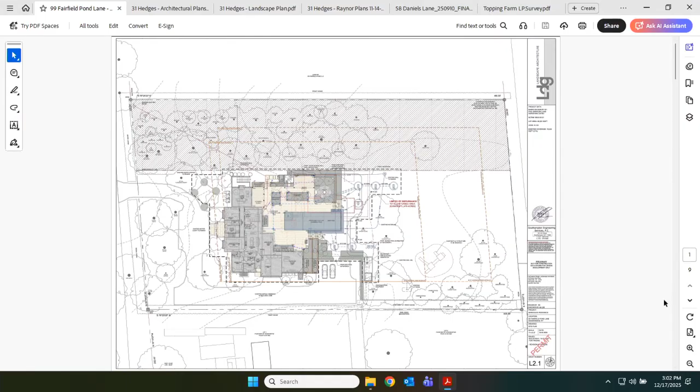Perfect. So one of our biggest concerns in the last round of comments was just to make sure that the applicant wasn't going to disturb the conservation easement on the north side of the property there.

We had asked them to demonstrate where the construction equipment was going to be coming in, and they've done that. They've proved that the construction access and construction vehicles can actually navigate through the site. They altered the grading in the rear yard a little bit around the pool, and they flattened the area immediately north of the driveway just a hair. I think that works out really well to allow construction equipment to get into the pool area without having to worry about any equipment going through the conservation easement that we want to make sure is not touched. I think they did a nice job addressing all of the concerns that we had.

Assuming that the applicant has addressed all of the outstanding comments of the village planner and the village board, we do recommend that the subject application be considered for site plan approval, with the same condition that we normally volunteer: that the applicant shall be responsible to repair any damages to the village right-of-way incurred as a result of the subject application. Just to have the sequence of revisions for the board: the original October 22nd, 2025 issue date, revised October 23rd, and then a final date, if it's for approval tonight, of December 4th, 2025.

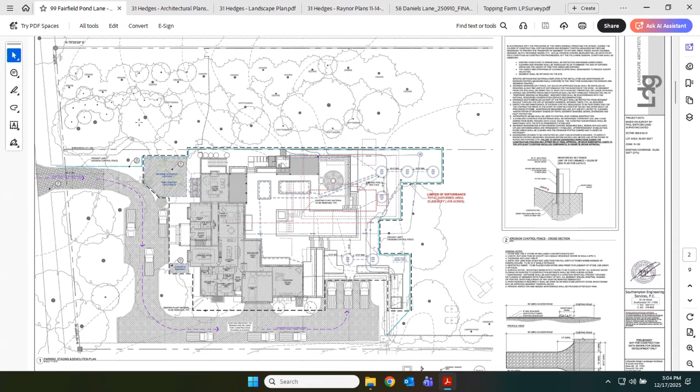New business: site plan application of the Winnie Trust, 31 Hedges Lane. Someone's here to present.

Do the camera so that it can, is it possible to? Excuse me, hold on a minute, Melissa. Whoever has their mic open, can you please mute yourself? Thank you. Go ahead, Melissa.

Good afternoon, Melissa Dedovich, Peconic Environmental Associates. I'm here on behalf of Winnie Trust LLC. I'm joined by Tim Haynes, the architect, on Zoom, as well as Denise Gernick, associate, Melissa Rivas, a partner with Hollander Landscape Design, and Kelly Kalbacher with the Raynor Group.

I'd first like to start, I think everybody knows this property, it's a pretty special property. We're very fortunate to be working on a team and working for a family who really wants to bring it back into its historic integrity. One of the things about the history of this property is that it originally was two properties, 601 Sag Main and 31 Hedges.

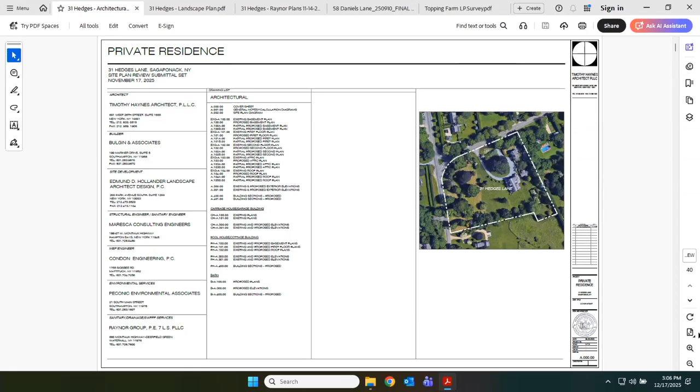31 Hedges was actually the one - could you go to the landscape plan? Is that it? Next one, more. Yep, no, this one. There we go, yeah.

So originally, you can see where the scenic easement was. Originally there were two properties, and the original property with the development on 31 Hedges Lane is the one with the two historic structures - the main house and the historic carriage house. Over the years, both buildings have been altered under the town of Southampton, to the point that to bring back the main house, the architects will get into more detail, but we need to bring back a lot of the historic charm and structures associated with the facade of the house.

Both lots were purchased by the new owners last year and were recently merged on October 14th, so the total acreage is now 3.95 acres. The clients retained Mr. Hollander to take a look at the site, and we also worked in conjunction with John Whitfield - there's John here.

Just to see how we fit from a zoning perspective - everything we're proposing is as of right, meaning no variances are required. So to generalize, what we're planning to do is remove...

Can we go to the demolition plan? Sorry. Was that - never mind the Raynor. The third tab, got it? Okay, there we go. Can you make it a little larger? Here, maybe, there we go. Computer, Melissa.

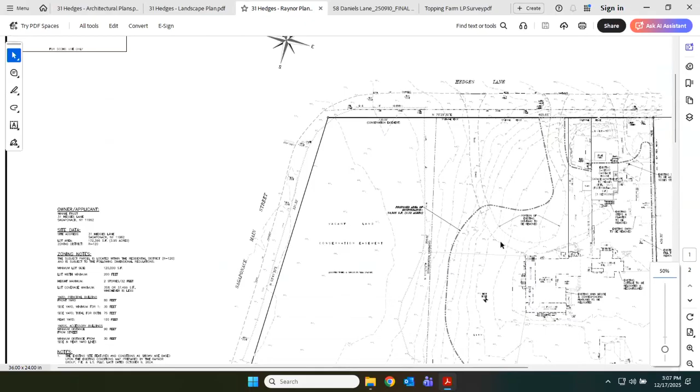Right now there is an existing structure, a former stable that's now a wood shop, on the eastern property line, and that's going to be demolished based on our review and discussions with the ARB. By the way, we've gone in front of the ARB for pre-application, and they said we're on the right track. They seem to be in support of what we're doing at this point - what we're showing you is what we showed them.

Then we're going to relocate the existing two-story dwelling about 45 feet to the west. We're also going to be removing some of the non-historic additions, restoring the house, and putting an addition to the rear. The architect again will get into more detail about that.

The existing two-story carriage house, which is actually a garage with apartments above, we're just renovating and restoring - no changes. The only change is in the back, an exterior staircase that was added in 1986 that we're going to remove.

We're also going to be constructing a single-story barn in the center, kind of in the vernacular of the existing or former stable, just to give a little more area for the clients and their four kids to have some more room. We also have a swimming pool with a surrounding terrace, sunken tennis court, fire pit, outdoor dining area and kitchen, and associated walkways and walls.

We're also slightly reconfiguring - if you go to the next, first, thank you. On this slide, or do you want me to go to the back? To second the page, on this one? This, right.

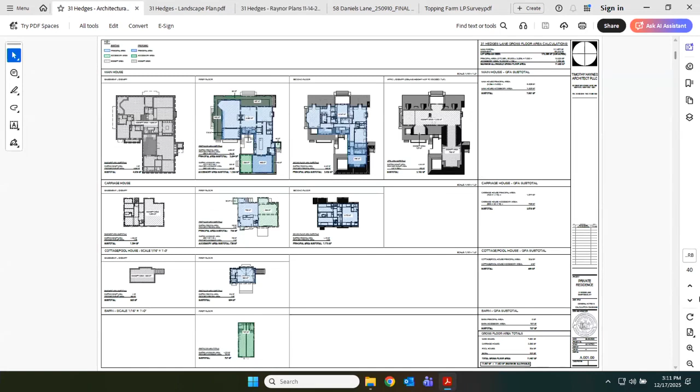I see it on C1 with the existing house to be moved. That's the existing house. We have another sheet, architectural, that shows it. Look at that, this is the new sheet. So C1 has the existing, okay.

No, go back. This one here does it. Okay, if you zoom in you can see the red, that's existing, and it shows where it's being relocated as well with the arrow.

Is it showing the driveway change? No, this is just architectural. Which sheet is this? This is the architectural sheet, 002. Actually it's the third page, lightly shown in red. Oh okay, on the sheet, on the existing structure.

This might be a good point for me to jump in. It's Tim Haynes, the architect, to talk about the shift, if that would be helpful. I'm sorry, last name again? Haynes, Tim Haynes. Mr. Haynes, you've got many people answering for you. That's good, I guess.

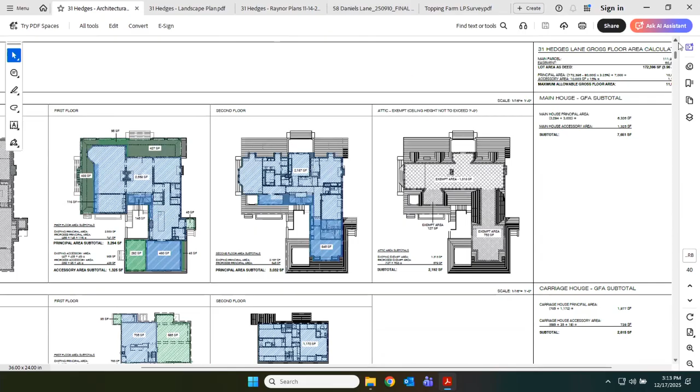So when we decided to combine the two properties, we made a couple of other strategic design decisions. One was to remove the stable that was back against the east property line and move it further into the property, so it was conforming. And then we had some extra square footage to add on to the property. Our objective was to restore the facades looking out at Sag Main in particular, and also onto Hedges, bringing them back to their historic state, because they had been filled in and made not historically correct. So we put that back into correct shape.

And then we wanted to put our additions on the back. So all of those things had us shift the house so that it felt more landed within the large parcel, as opposed to everything sort of squished back against the east property line. We wanted it to breathe a bit more and give us the space to do that, while still maintaining its prominent position on the hill.

I live around the corner, so I have watched this house for a very long time, and I'm actually the one who brought the clients because I wanted to find someone who was sympathetic to saving it and restoring it and putting into it what the property deserves. So that was our reason to slide this thing towards the west and a little towards the north.

45 feet's a lot. Is it on the hill? You have to bring in building stuff? We're not bringing anything, no. Ed and I spent a lot of time on the property to see what would make it seem like it had been built at the crest of the hill, with its wraparound porches, which we're restoring, which right now are not wraparound porches. There was this idea of it being an overlook at the high point on the property, feeling more central to the property, as opposed to when it was on a smaller lot pushed back. So it's now overlooking the reserve, the conservancy in the front.

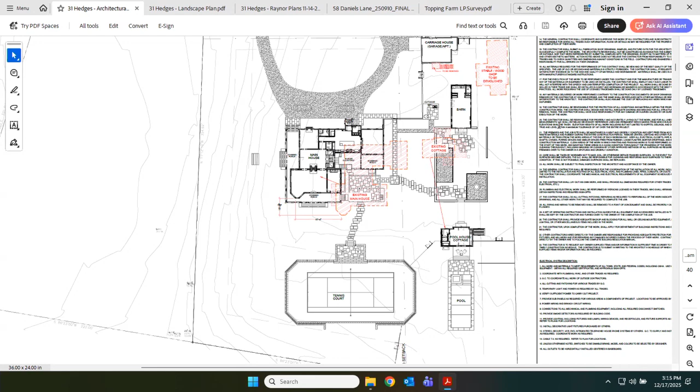300? Yeah, but it's not elevation. It's elevation, yes. We have a diagram showing the renovations and additions to the property. That would help.

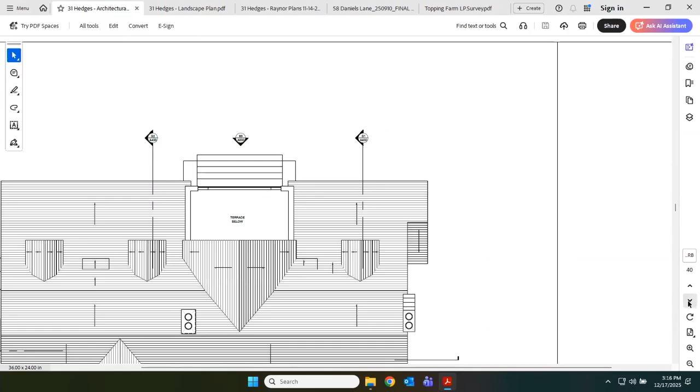So how much is the house being moved to the north? Does it look like it's 15 feet, 16 feet? So the big move is to the west, yes, it's almost 42 feet. So what's up there right now?

Probably in here, I didn't look at it. That's being moved, the little cottage - does that have a separate CO? That's your south elevation. No, it's the one at the front. Right, is that it? Is this what you're talking about? Yes, that's right. We're moving it down and turning it. Oh wait. Yeah, change, nothing to demolish here. You're not, except for that, just the wood shop. Right, this is falling apart.

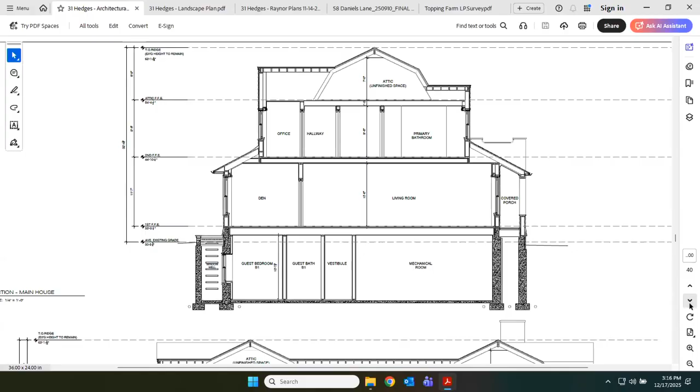This is the chart showing where it all came from originally, pursuant to the permits, as it came up. Proposed elevation, yes, it's on the same sheet, sheet A300. Each of them, make it smaller.

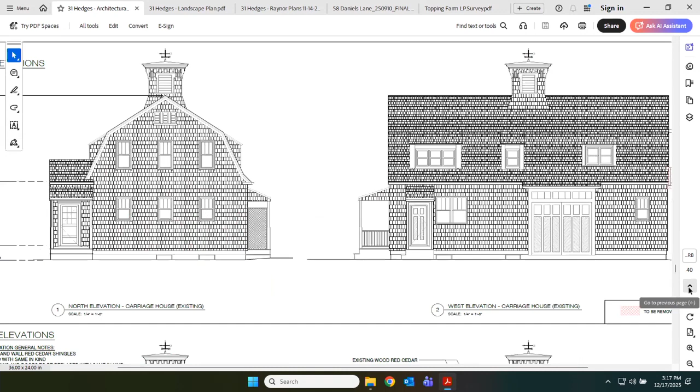So what is the elevation increase from the existing house? You can see it if you enlarge it. All right, here you go. Could you zoom out a little bit? There you go.

See the cottage? So we have existing above on the same page, and proposed at the bottom, so you can see it. Very sensitive, so what is it, feet-wise, what's the increase? Is there an increase on the elevation?

Yes. Not on the west side, only on the north side. So the addition being put to the back of the house, to the east. So that's not the west, right?

Are they taking this out, or is this an addition? No, this one's the south. That's the south. So if you go to the next page or the previous page, what page is this before? Over here, I can't see it.

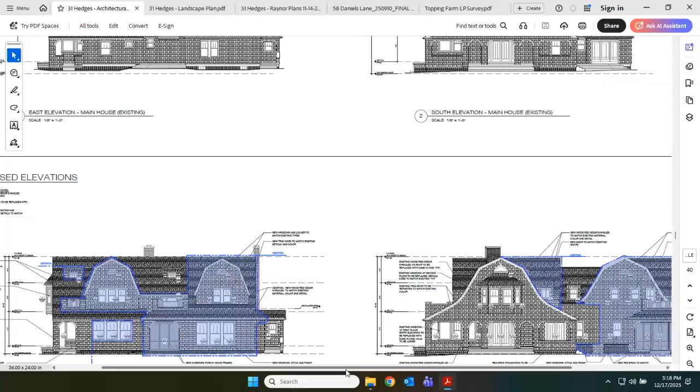That's the east one. So if you could go to the page before, to the west, right? These are the prominent elevations, these are existing, and below is what's being proposed. So the west elevation is only changing in terms of the wraparound porch. And as you see, the north elevation is where the addition is.

So if you look at this, they now all have it filled in. Yeah, it's all filled in, and that's gonna be a wraparound. Which page is that? This is A300. You all have these in front of you.

No. Push back, well, we have like 50 of them. What I have up on the screen. They should identify one on my sheet. So Tim mentioned that currently it's still included, so we're bringing it back. You can see this is all filled in, and now we're making it wraparound.

I grew up in this house. Oh, you're kidding me. I didn't grow up in the house, but I hung out like a fella.

So the big move is to the west. Yes. And what do you have to do for that? Is there any movement of landfill, or what has to be done there? That's 40 feet, kind of significant. Yeah, there's some slight regrading.

If you wanna pull up - maybe this is better for radar - there's a little bit of regrading that happens to that side of the house to accept that. Other than that, there's no existing trees or anything in the way. The only trees being removed on the property are where we're putting the pool. There's some evergreens back there and there's this little cutting garden back there.

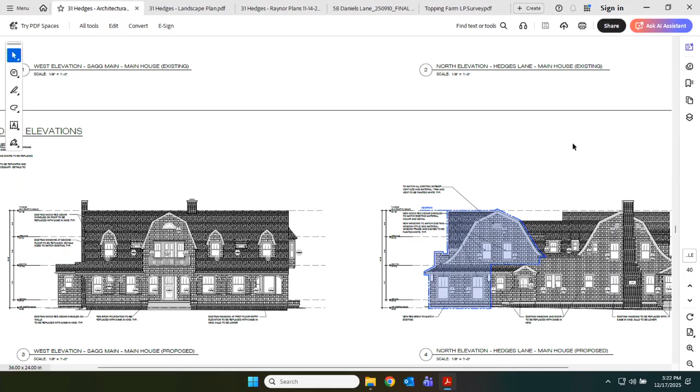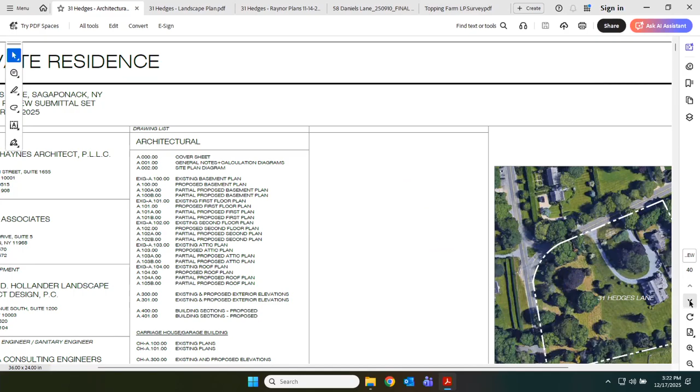Bill, do you want to hear from the civil engineer? Well, are we... says no. I'm happy to talk about the landscape, since I would like to.

Okay, I would like to graphically know about what you're gonna do with the property. It's a big piece of property.

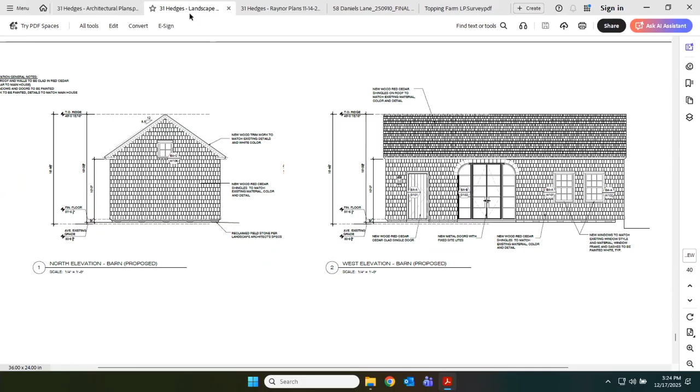Yeah, so we had the ability to walk the property with Tim when the clients were purchasing it, and they also had the ability to walk it with us, which was really helpful for us to hear about the history of the property from their eyes. They did a lot of great work putting a large portion of this into the easement, remaining just as it is today. So all of the area along Tagney will remain exactly as it is. The area along Hedges is also a pretty important scenic easement for the village, and this property really is a large portion of that fabric of the village. So everything along that corridor is being left as it is.

All the beeches that are there now, the dogwoods, the hedgerow along Hedges is remaining. The driveway is also remaining, so the entrances you see now along the street are being maintained. The benefit of the work we've been doing with the office to move some of the structures around gave a little more organization, and it allowed us to put a lot of the private program for the family, the pool, the entertainment areas, and the tennis court behind those important buildings. So everything will be subservient to those structures, and everything visible from the two main roads here in Sagaponack will remain largely as they are today.

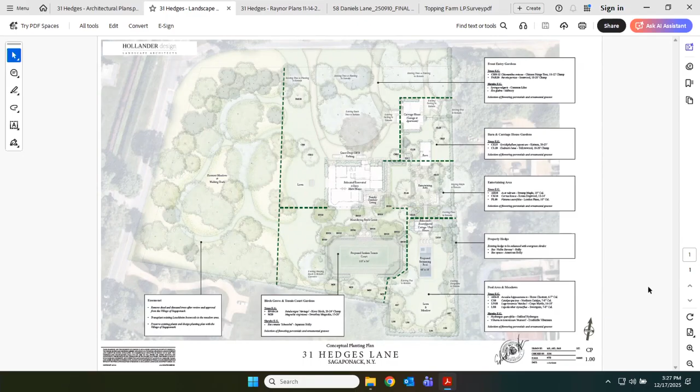Thank you very much. For the record, Kevin Peterman from LKMA as village engineer. Today I'll be speaking only on the engineering. Rich had prepared a planning memo, but I understand he's not here today, so I'll be speaking strictly on the engineering.

LKMA has reviewed the application materials submitted on behalf of Winnie Trust for the proposed improvements at 31 Hedges Lane. Our review focused primarily on the site plan prepared by the Raynor Group dated November 14th, 2025. The subject parcel consists of approximately 3.95 acres and is presently improved with a single-family residence, carriage house, cottage, barn, patios, and porches.

The applicant has submitted a site plan application pursuant to Village Code Section 245-65F, as the proposal includes modifications to the existing topography. The applicant proposes to relocate and reconfigure the existing two-story dwelling, shifting it about 40 feet west and 15 feet north. The existing barn is proposed to be demolished, and the existing cottage is proposed to be relocated south and converted into a pool house. The two-story carriage house will undergo renovations as well.

Additional improvements include construction of a new single-story barn, a sunken tennis court with terrace, swimming pool and spa with terrace, a fire pit, outdoor dining area and kitchen, walkways, and various retaining walls. The project includes new IA sanitary systems, site grading modifications, a new stormwater management system, landscaping improvements, a sunken courtyard, and window wells along the main residence.

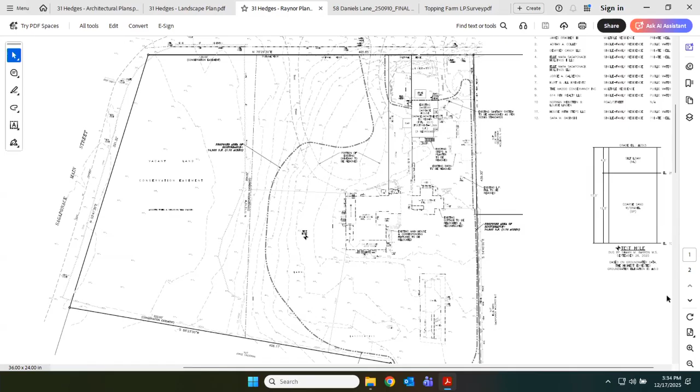We're asking the applicant to take a look at the south side of the proposed tennis court. Rhodey, on sheet C2, the next sheet in that set. Is this the set? Yes. Go down one. There you go. If you were to zoom in, page bottom, at the tennis court.

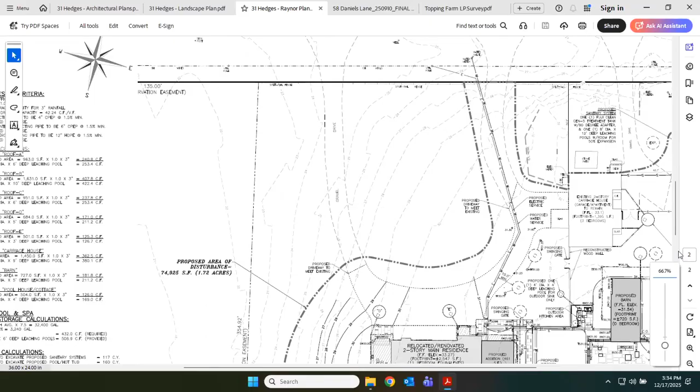Along the south side of the court, the applicants appeared to make an effort to satisfy village code, which requires that the tennis court be sunken 4 feet from adjacent grade. We see that they're surrounding the tennis court with a wall, making an effort to drop it and satisfy the code. But they don't quite hit that 4-foot mark on the south side, so they're not maintaining that 4-foot vertical differential from adjacent grades. They're kind of sloping gradually to get up, but even that gradual slope isn't maintaining the required 4 feet. So we're asking them to take another look at that. Maybe if they're able to get that to 4 feet, we can all feel good about satisfying the code on that one.

And then that's pretty much it. An export permit may be required from the village building inspector for the net export of 1,947 cubic yards of material. I know there were some questions before about whether fill would be brought into the site or if there would be cut. A cut-fill analysis was performed, it was reviewed, and it seemed reasonable. The results of that analysis yielded 1,947 cubic yards of material to be exported from the site. That may seem like a big number, but when you think about the scale of this operation and application, the size of the basement going in, the swimming pool, the sunken tennis court, it's a reasonable number.

Outside of these comments, we remain available to answer any questions the board may have. Does the board have any questions? No?

Questions? You got it all, and probably writing.

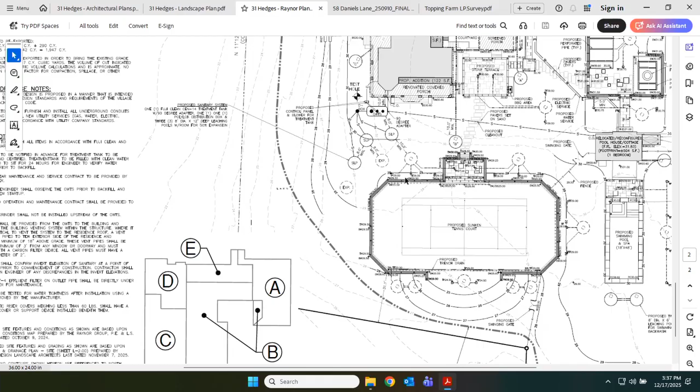Thank you very much. Thank you, Merry Christmas. Thank you for the meeting. Kevin, thank you very much, love your reports, plenty of detail. Happy holidays, Kevin. Happy holidays, everybody, see you soon. Have a good holiday, you too. Bye-bye, thank you.

Special permit application, topic of discussion.

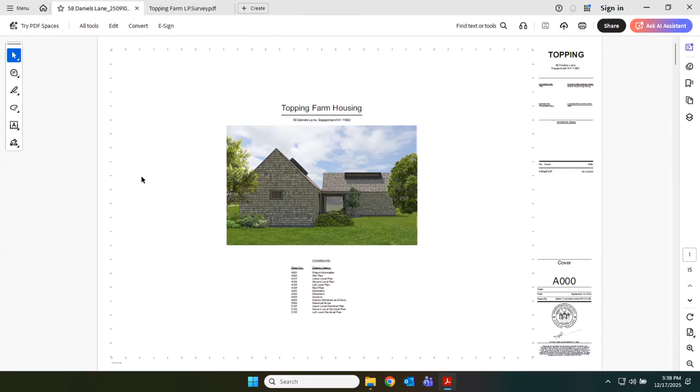Hello everybody, Tony Pasca here from the Public Comment. Just so everybody knows, the Topping family are here representing the families. Geno is the current general partner, and we all know their history with this farm, it's a multi-generational farm - we could say it's one of the OG farms in Sagaponack.

This is a next step in the long-term preservation of the farm, which began several years ago when we engaged in a deal with the town. It took about 4 years to come to fruition, to preserve the farm in perpetuity, and that lasted from about 2000 to 2004. Now that's past us, Geno has been looking at modernizing the facilities and fixing them up, getting it ready for another 50 years of use. So the step we're here to ask about is the agricultural house.

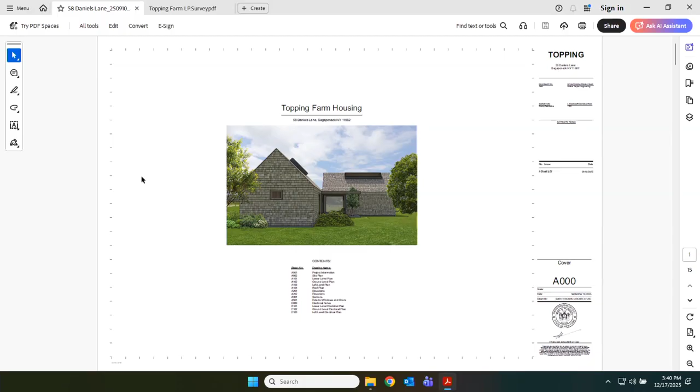I brought an aerial because I think it's important to see what we're talking about in the context of the overall farm. Do you mind if I hand this out? I should have sent this ahead of time so you could put it up. It's just an aerial off the GIS system to show where the structures are in context of the overall farm. Put up the survey, and the other thing to put up.

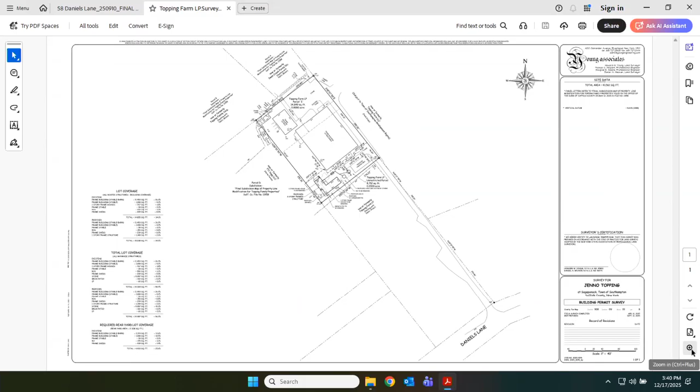I'm going to walk over to the screen for a second to specify, just this little structure here in the corner. What I want to draw your attention to is a dashed line that runs between these structures up here and everything else. That dashed line is the conservation easement we did with the town, and the reason we did it in that jagged way was for this very reason.

These buildings, the two structures that this L-shaped structure is going to replace, were tiny cottages used for staff housing for the last 50 years. When we talked to the town, their normal agricultural easements don't allow for any kind of housing, so we either had to modify the ag easement or carve it out. We chose to carve it out to keep things simple with the town, so it's not part of the protected portion of the property, it's part of the unrestricted portion, not subject to the town's oversight. But this has kind of been planned for a while to try to fix this up.

Your code does allow for agricultural housing, so that's what we're asking for - to take a non-conforming situation and turn it into a conforming agricultural building. To do that, we have to combine the two little cottages into one, because your code only allows for one such structure on each farm. We're going to need a couple of variances from the zoning, and we'll talk to John about that. We wanted to start here first to get feedback from this board, since we will have special permit jurisdiction.

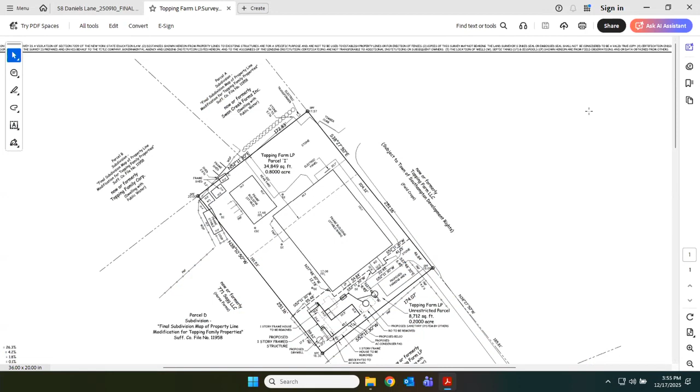Okay, T-Mobile, we have somebody here from T-Mobile to tell us about more structures in the village right of ways. We have to have copies of these. Sure. They have that in their packets. Oh, they do? Yeah, okay. They do. Same thing, thank you.

Mayor Phillipson, village trustees, my name is Dave Capel. I appear before you as a consultant with Crown Castle. Crown Castle is a neutral cellular communications development company, and we're in the process of planning and deploying a system of what they call small cell sites across East Hampton and Southampton town. The project in East Hampton is underway, and we're now consulting the various municipalities, including Sagaponack, on the Southampton project. I'm pleased to be joined this evening by Paul Costa and Warren Bird, also from Crown Castle. At this point I'll let Paul take it from here.

Mayor, trustees, I'll just have three things to talk about today: who Crown Castle is, what infrastructure we build, and then how it's going to improve coverage in the village. As David mentioned, Crown is a wireless infrastructure provider. We build towers, small cells, and fiber for carriers to access, but also our fiber is used by businesses, hospitals, and schools to access the internet. We've been on Long Island for 15 years, we have over 500 miles of fiber, we've already built 1,000 small cells on Long Island, 168 towers, and we have an office in Melville, so we're part of the community here.